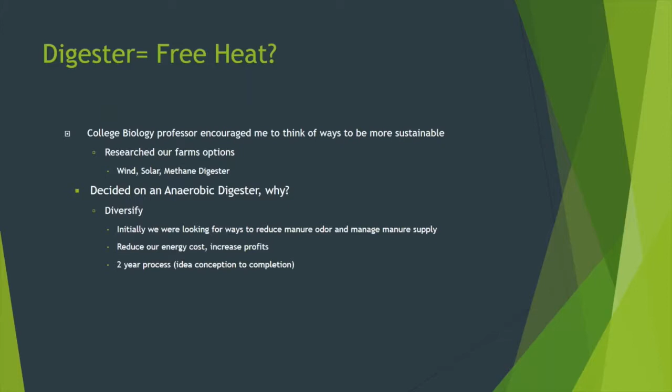We wanted the brand name RCM complete mixed digester, now owned by another company called Martin's Energy. We started in 2008 and sized it for 1,000 cows because the plan was to grow quickly to that number. We haven't gotten close yet, but thank goodness we didn't, for another reason I'll talk about later.

It produces 140 kilowatts an hour of electricity, enough to power our farm and about 80 houses in the community. We flare a bunch of excess gas because our motor isn't big enough to handle all the methane we're producing now. We also separate the solid manure from the liquid manure, which I'll show you how we use.

It was a $1 million project, 60% financed by grants. It doesn't require much time—maybe 15 minutes a day when it's working right. I'll explain what's going on with our digester in a bit, and about heat as well.

What we put in our digester to make heat is manure from about 700 cows on our farm. We scrape the manure 3 times a day, and it's pumped into our digester every 4 hours—a little bit each time. With all the cows we have and the manure we capture, it's about 12,000 gallons of manure a day.

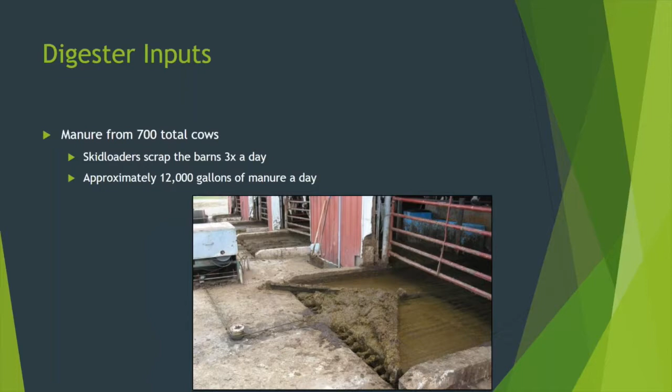Manure is where we get some of our methane, and we also put in food waste. Since 2008, we've been getting food waste from various sources, though it's come and gone in spurts. Recently in June of this year, we decided to invest in a food waste depackager, so we've been getting beer, cans, and lots of different grocery store waste. Anything in packaging—it's helped us have a more consistent food source for our digester, helping us more consistently produce gas that eventually makes heat. Starting this in June has kept us pretty busy.

In the bottom left-hand corner is a picture of our depackager building, which helps us keep all the food waste that companies are trusting us to destroy locked down and secure.

And then the other two pictures show the machine that we use and some of the cardboard that we recycled. Food waste is a big item that we put into our digester. We get about 30 to 50 tons a day on any given day. It depends—some days we'll get zero, and some days we might get 75. So I'd say 30 to 50 tons a day is what we typically get.

So we put it into our digester, and then we have a second one that my brother owns four miles down the road. He also gets some food waste as well, and that's where our young cows are at.

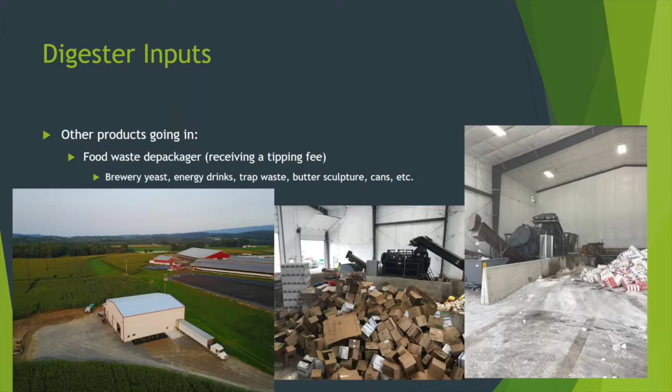Before I talk about heat, I'll talk about some of the things a digester produces. On our farm, it produces electricity enough for about 80 houses, and we sell that to our local power company, PP&L, and they pay us once a year for any excess that we have.

To be honest, as we add more barn fans and more electric motors, we're getting to the point where most of the electricity—we're not there yet, but very little is sold as excess. We still think we have enough to power 80 homes, but in the next few years, if we continue to grow and don't add another motor, we'll just be using all of our energy on the farm.

So that produces income for us. Another thing we get out of our digester is bedding.

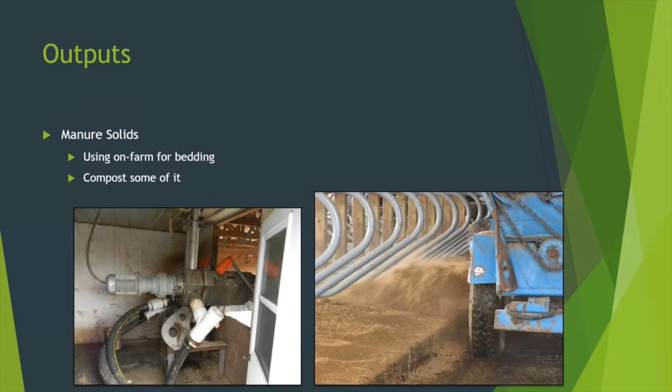I talked about the separator earlier that separates all the solids from the liquid. We use the solids as bedding. It's completely sterile since it's been in the digester at 100 degrees for approximately 30 days, and the cows love it—it's nice and fluffy. By recycling manure this way, it saves us about $50,000 a year, and it's a really healthy, comfortable product for the cows to lay on.

But I know you guys are all here to hear about the heat, so I want to talk about that for a while, especially how we use heat on our farm.

So we're going to go on a little tour of our farm.

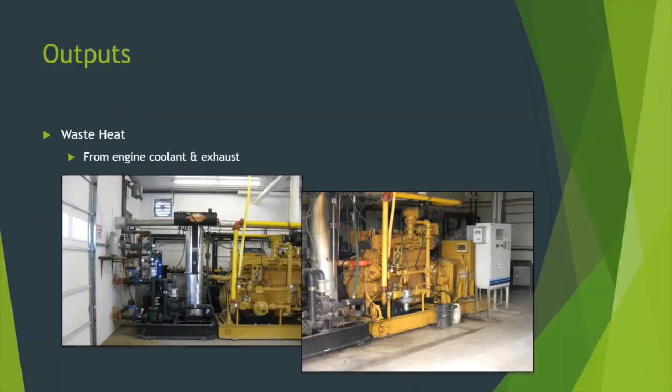So the first place that all of our heat goes to is the actual digester, where the gas is being made. That needs to be at a constant temperature at 100 degrees always, and so that tank is insulated. There's 450,000 gallons of manure and food waste that are in there for 20 to 30 days.

And so we're always adding - if we're adding 12,000 gallons of manure a day and 12,000 gallons of food waste a day, we have to heat that to 100 degrees pretty quickly. So there's quite a bit of heat that goes into keeping that tank warm at the right temperature, so that the bacteria and the methane producing bugs are not dying off.

And so that's where we direct all of our heat, primarily if there's an issue with like the motor or something. So we keep that warm. That's how we keep the digester alive.

The other place that waste heat goes to is our pasteurizer. This is located directly to the right of the digester motor, just on the other side of the wall. And so we pasteurize all of our milk with the free heat coming off that motor.

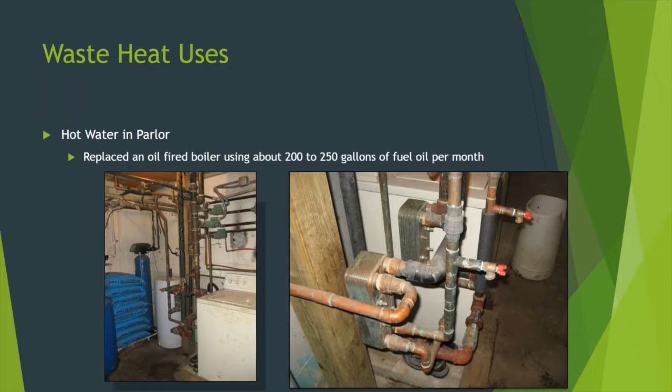We also use hot water for our house, my parents' farmhouse. They have a backup oil furnace in that house just in case, and actually today it's being used simply because we need hot water for the barn, so they're using that. We're sending hot water over to the house at about 180 degrees from that heat exchanger through PEX piping located under the ground.

It's insulated PEX piping, so we don't lose the heat on the way over to the house, and that keeps that house plenty warm in the winter. Again, it's all free heat from our motor that we're using.

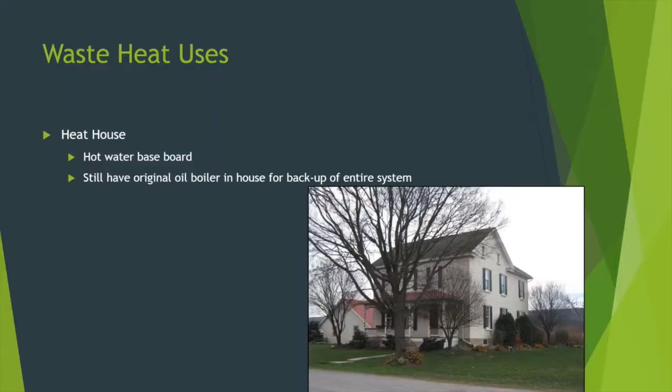A funny thing happened yesterday, we called for fuel oil because we needed to order some, and they called me back and said, 'Are you sure we're sending it to the right address? Because we haven't delivered any fuel oil to this location since the beginning of 2015.' I had to chuckle because we haven't bought fuel oil forever on our facility here.

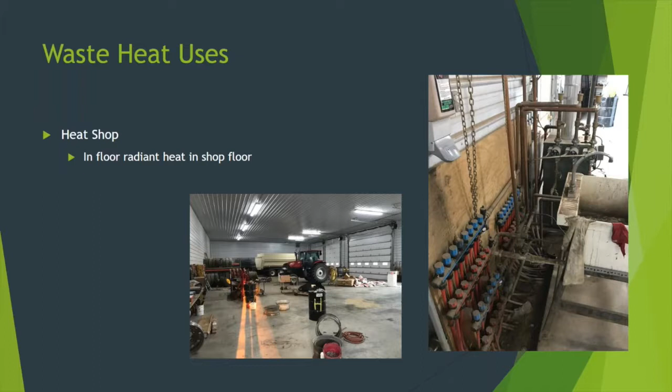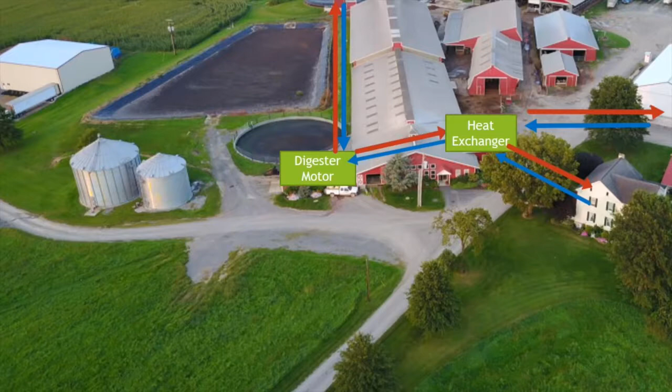This is another location that has a backup furnace that rarely gets used. You can see on this screen the red and blue arrows on the top right showing where our shop is located over there. All that's under the ground as well. So that's where we send hot water through our farm, mostly underground, and we also have access to heat that's in the digester motor room.

When we close the doors where the digester motor is, it'll get to 90 degrees inside there if we don't turn any fans on to vent it. So what we decided to do in the winter is put a fan in the ceiling with some air duct piping. We suck the air from the top of that room and blow it over into our parlor.

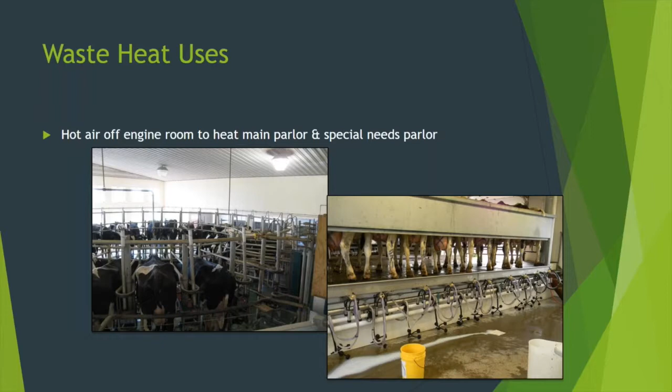We have two milking parlors, one for milking cows and another for cows whose milk we give to their calves. We heat both of those with the hot air generated inside the motor room in the winter. Again, free heat, and it's right next door to the motor so it's easy to get there.

The biggest savings this digester produces for us is the ability to dry our own grain on our farm. We pull all the hot air, and we'll start drying corn here probably in 2 days once our motor's up and running again.

We can control the temperature of the heat just by opening and closing the pipe valve we've built into it. And we dry our own corn.

This year we'll dry about 75,000 bushels of corn, and that'll save us right around $20,000 on drying costs. Again, that's just free heat that normally is vented to the outside air, but we've decided to capture it and use it to make our farm a little more profitable.

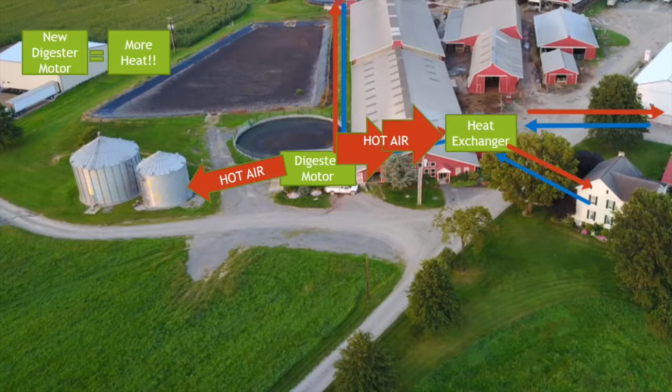A couple years ago, I tried to use the excess heat off the muffler buried under the ground on our current motor, and I built a greenhouse right on top of it, and it blew down as soon as I had it up. So I lost my motivation to continue, but I was planning on maybe doing aquaponics or hydroponics in there and having a greenhouse year-round.

That's an idea for us, but we have local businesses that do use hot water, and we're toying with the idea of just heating a tank in an insulated trailer and delivering hot water to them as they need it.

So there's lots of possibilities for heat. If you have any ideas for us, let us know. Most of the ideas we use on our farm have actually been given to us by other folks. When we built our digester, we had no idea we could use all this extra heat, and there's plenty of extra in the summer that we can use, and with this second digester coming online, we'll have plenty more.

Unfortunately, we're not close to any businesses where we can pipe the heat under the ground over to them in a cost-effective way, but we're always trying to think of ideas.

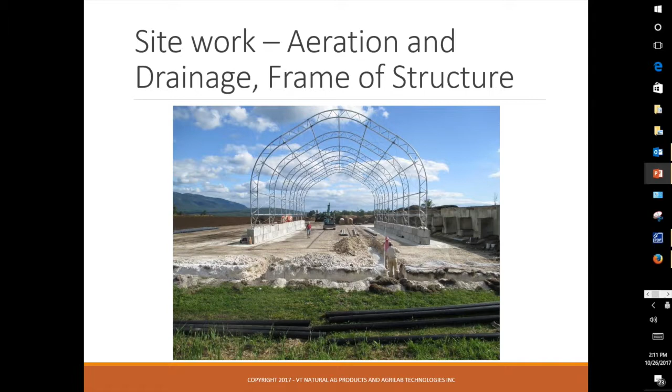What we're doing here is a combination of pipes on grade or above, basically sitting on top of the working pad for the aerated portion under the windrows. To connect them to our fan and the other mechanicals and heat recovery equipment, the pipes did go underground to permit equipment access around the site without having to drive over pipes.

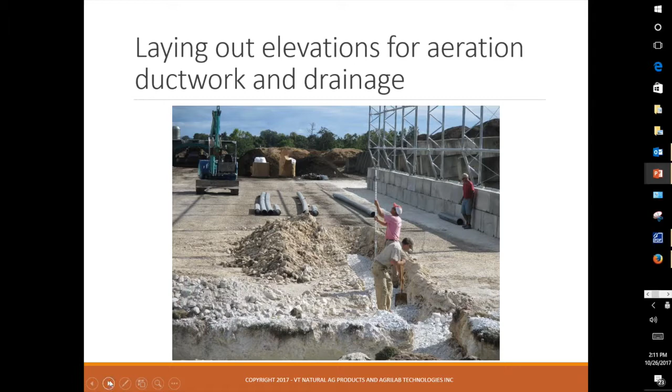Here, this was the header pipe, and this lines up to where we were going to place the box. In the background, that green building is where the Fosters bag and palletize their products, and you can see a few of those wrapped pallets out in the yard as well. That bagging building is one of the energy loads we were able to meet by recovering energy from the composting process to heat the radiant floor in that building.

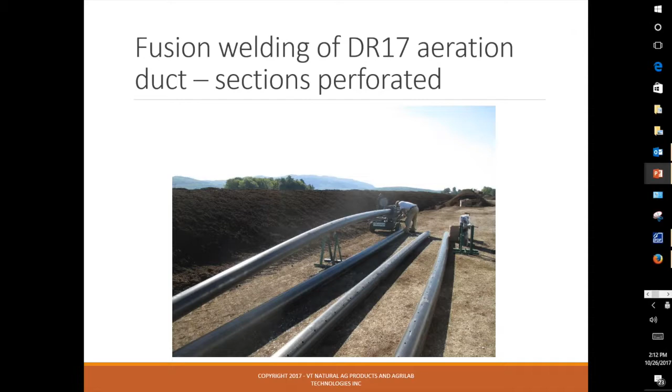Here's a picture of Ryan Kolosky and our team doing the fusion welding of the aeration pipe. We've used PVC pipe on earlier projects, and that's still somewhat common for some aeration systems. This DR17 pipe is made of high density polyethylene, far more rugged and durable. You can either perforate the aeration holes yourself or have it come through the manufacturer.

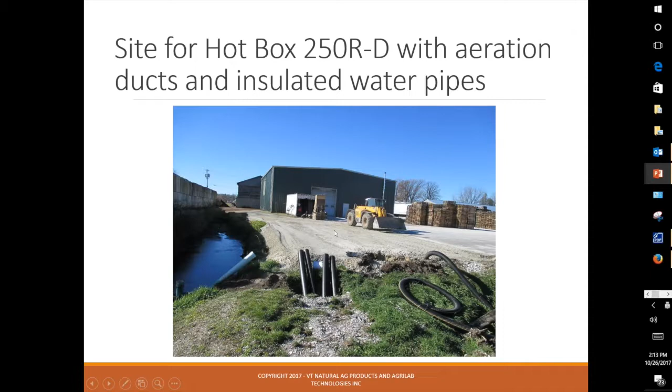After welding and lining up all the pipes, they came out to our landing pad. Again, this is where at the edge of the site our unit will sit, and basically in this 20-foot shipping container shown right here, it shows up plug and play, so to speak, ready to be connected.

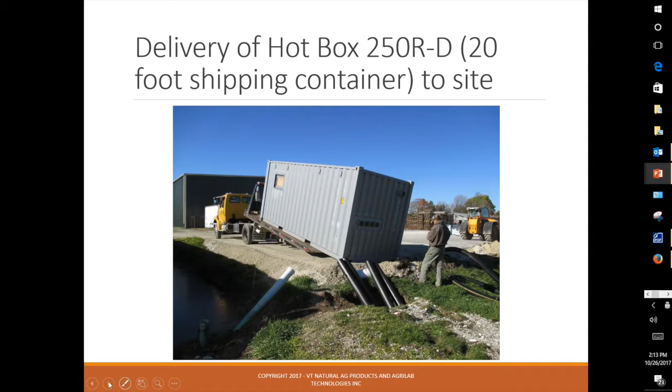These next few slides illustrate how we make the quick connections using flexible or ideally rigid pipe to connect the stubs of the aeration channels to those metal intake ports on the back of the unit. That's where we draw the air and heated vapor into the system to aerate the piles. In this picture, inside our shipping container, the hot box, these blue and red pipes coming up through the floor are how we circulate the hot water and return to the bagging building to provide that heat.

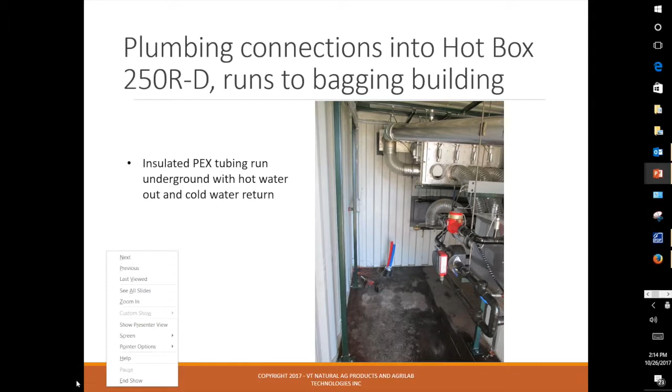So there is a significant load to heat that building and maintain it at a comfortable working condition.

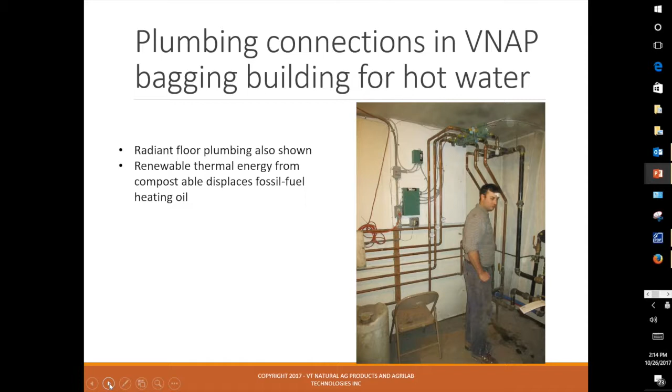Electricians were here too, probably only half a day to figure out how our unit was wired and bring service from the existing panel on site.

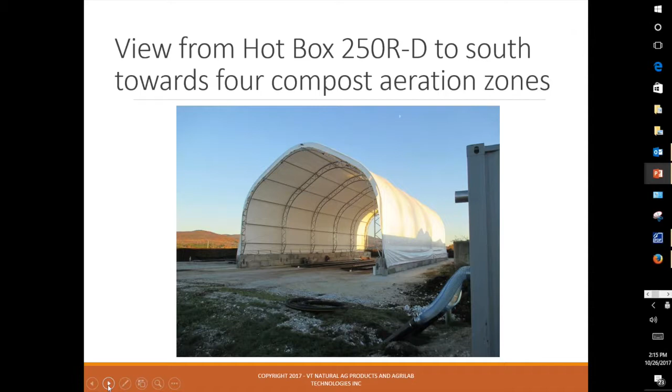After everything's connected, you can see on the right of the screen our shipping container, the hot box, in the foreground. Looking back, the pipes go underground and resurface under the coverall structure. You can see the black pipes come out, with two lines going under each windrow in this portion of the site.

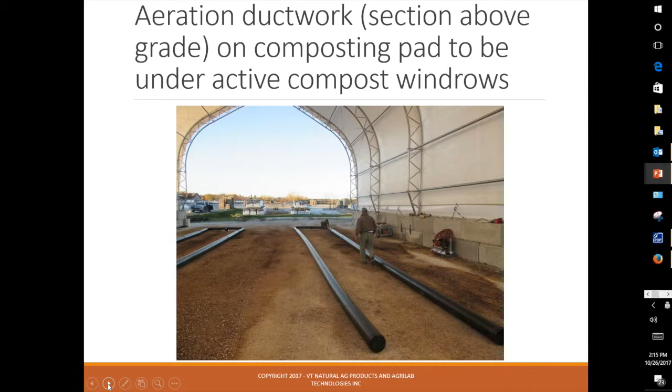A closer view of the pipes under cover here. We did end up bringing them closer together, but at first they were laid out trying to match the 18 or so foot width of the windrow that they use.

As part of the aeration process, we want to be able to distribute air evenly at the base of the pile. Putting the coarse, clean wood chips around and above the pipes accomplishes better air distribution at the base of the pile, the part that in a typical turned windrow would be most prone to running out of oxygen and slowing the decomposition process.

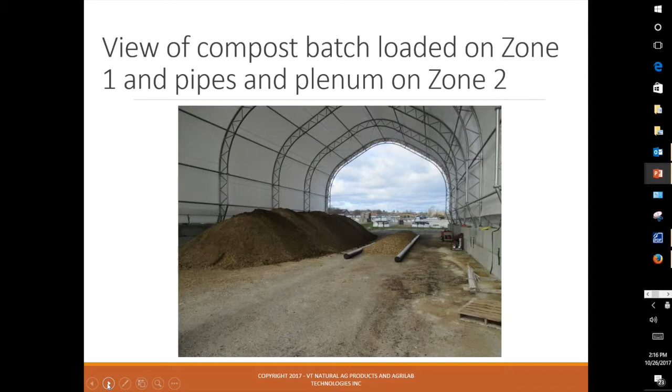This is fairly standard, using resources like the on-farm composting handbook, and there are other engineering methods to get the right perforation schedule, but it's something we've been able to refine over the years on these projects.

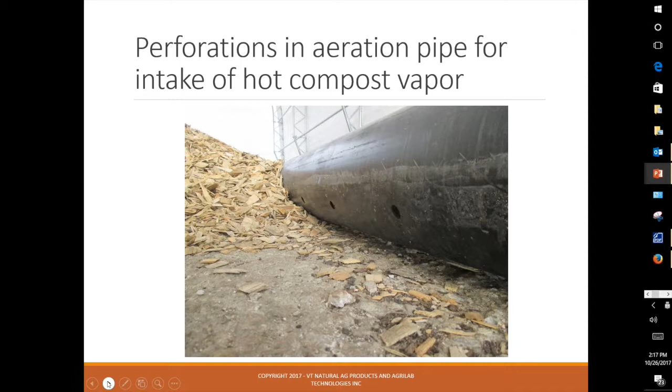Here's a picture for those who may not have seen these before. This is called a straddle turner, essentially a mechanical tiller that goes over the pile and is able to mix, blend, and at least for a short period aerate the materials in a compost pile.

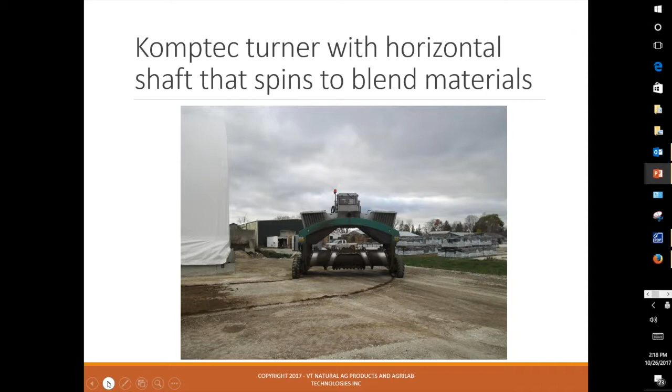While that still happens to some degree during these turning events, that's really the source of energy that in these projects we're pulling into the ductwork and over the specialized heat exchanger, and that's the renewable energy resource we're putting to work on these projects.

This view is looking back from the compost piles toward the aeration unit. Again, the pipes travel underground for some period. The white wrap is insulation around the ductwork as it goes into the intake ports. Above that, to the right, the other circle is the exhaust port, so when we're running exhaust, you can often still see a plume of steam coming out.

On the left, the hood with the orange tape is the intake hood, for the air that we heat up to push into drying zones when we're looking to dry finished product prior to screening or bagging, or other materials like bedding that they've dried using the energy from the system.

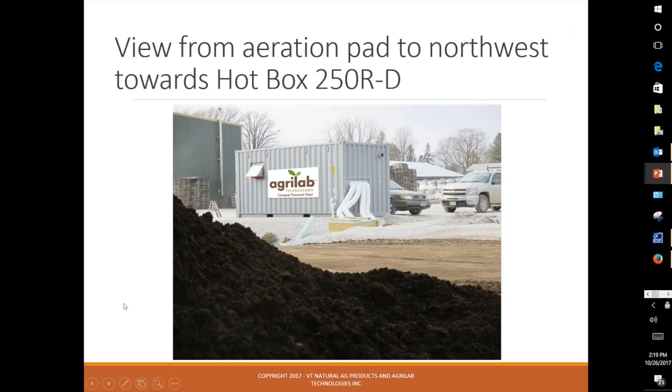The operator on site can use a series of touch screens to track the different temperature trends for different zones, change settings for the fan speed, and the timing for how long each zone gets aeration. One of the big advantages for us recently is that our team can view and control this remotely. Depending on the operator relationship, we can set up, monitor, and control those systems ourselves, or at least provide feedback and guidance when the operator is doing new batches or would like to do troubleshooting.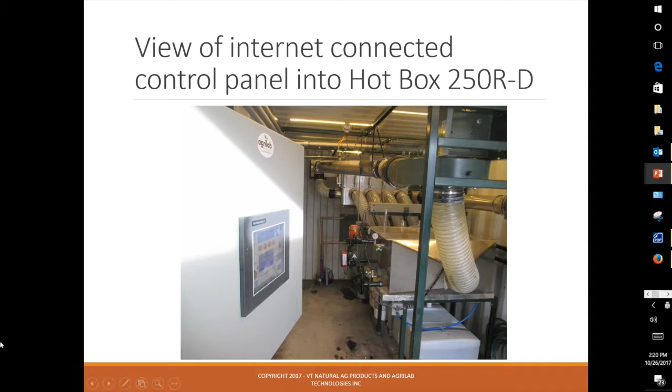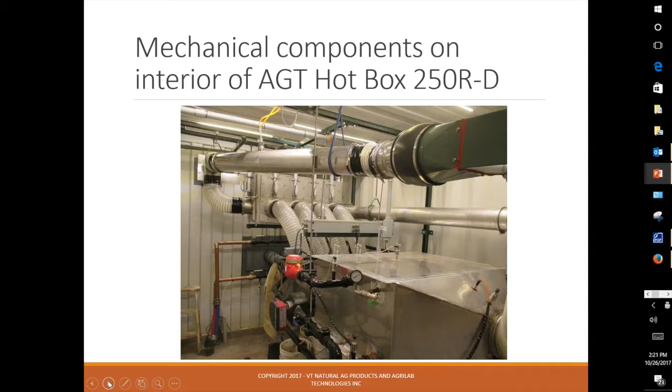Another closer up view. The one thing I can point out in this slide is the top bank of valves and pipes is a recirculation plenum. That allows us to push heated or dried air back out into any of those zones. That's another way we can accelerate the process during the active phase, or push the heated dry air into the compost piles when we're at that phase of the process.

Here's a screenshot of the control panel. Again, it's a dashboard showing the different temperatures and flows, both of the vapor and on the water side, and shows which zones are open, which pumps or fans are on. So this is the interface that we have to work with.

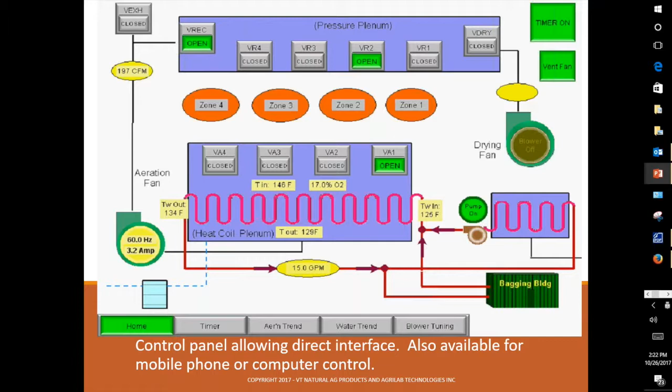These other screens can also help us change the settings on the timer, and the aeration and water trends can show us how much energy and what the temperatures are for vapor and water when we're aerating different batches of compost.

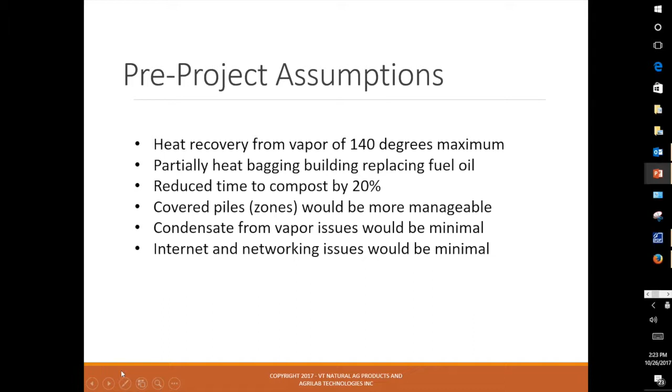Going into this project, we were working with the Foster brothers, who are experienced composters for a number of years. They went in with expectations that given the length of the runs, we'd probably only get 140 degrees into the system, partially replace their fuel oil, reduce their compost processing time by about 20%, and a few other expectations on managing it.

Another assumption was that they wanted to get away from using their propane dryer as much, or completely. They use that for some of their product lines, so that the material is dry and stable before they bag and shrink wrap it and have it sitting in a customer's garden center.

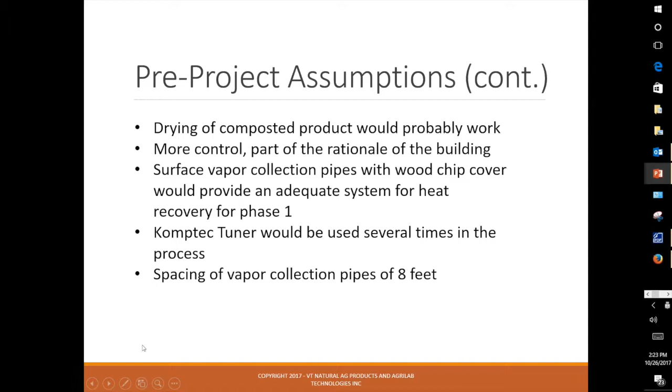The spacing of the vapor collection pipes was something that we expected to match their windrow dimensions initially. What we actually learned is there was a ton of energy in these piles, and providing additional oxygen ended up making them even hotter. We saw vapor coming into our system as high as 170 degrees. That's actually too high, so fortunately we can respond to get it into more desirable 160 or below temperatures by increasing the fan speed and lengthening the aeration times.

So far, we've seen that roughly two-thirds of the oil they used to heat the building has been cut back. Perhaps most importantly, we've reduced their composting time by up to 50%, essentially 4 months down to 2 months.

While there wasn't a whole harsh winter, the compost zones that were covered didn't show a big difference during the active phase. However, the piles under that covered structure are the ones typically dedicated to drying. So if you do get a heavy storm as you're trying to finish drying a certain product, it doesn't go backwards right at the end.

We did need to update some of our condensate traps to prevent water blocks in the lines, but they've been working well for close to a year on that front. They did have some particular data issues with their own site, but we were able to use a temporary hotspot to still do that data transfer where we could view it, and it's been working great for a number of months now.

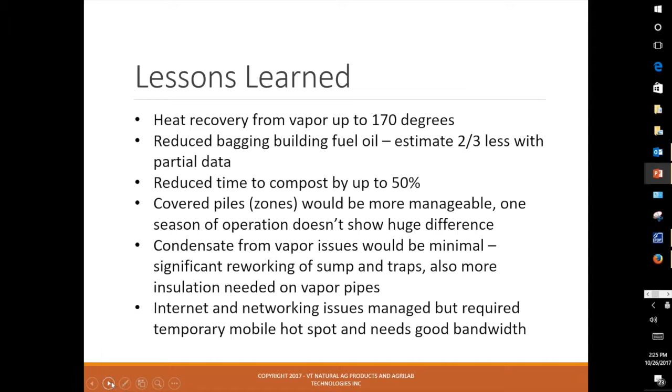Just a little more detail on some of those performance observations. Typically in the winter, it might take them 5 to 7 days to get the cold feedstocks up to 131 Fahrenheit or greater temperatures to meet the process to further reduce pathogens. With our recirculation and aeration feature, we're now typically seeing that in less than 24 hours. That's a great jump start at the start of their process, particularly valuable in northern composting conditions.

Rather than pulling in 0 or 10 degree air on a cold day, we're able to get the piles started with recovered warm air. Again, we were able to cut the processing time in the active phase approximately in half, and cut the number of turns with that Komptec straddle turner in half as well, typically 14 down to 7.

We've got one winter season of the radiant floor, so we'll continue to track the energy consumption. Importantly, the drying process worked very well. This is something that they use quite a bit of propane for, to dry a couple of their product lines. Now that we're expanding phase 2, with an additional unit and set of aeration zones, we'll see if we're able to completely eliminate their propane use in their process.

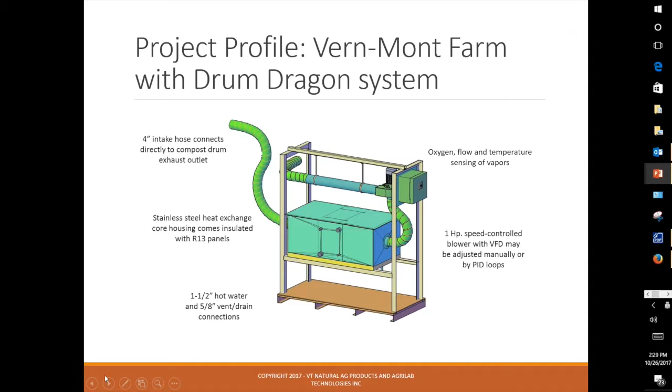The other piece, a couple other brief examples of projects that I wanted to share as I wrap up the presentation here. Some people are familiar with rotary composting drums. We developed and have installed a simple heat exchange and aeration unit to tap into the end of it. Had some fun calling it the drum dragon. Basically, we're tapping into the exhaust of those drums and putting that into a hot water recovery system.

This project's down in the most southeastern corner of Vermont. The Dunkley family runs Vern-Mont Farm, goes right to the Connecticut River, which borders New Hampshire, and right to the Massachusetts border. More or less, this Enviro drum runs their separated manure solids through the drum, a day plus retention time, and it's constantly putting out exhaust vapor at anywhere from 140 to 155 degrees.

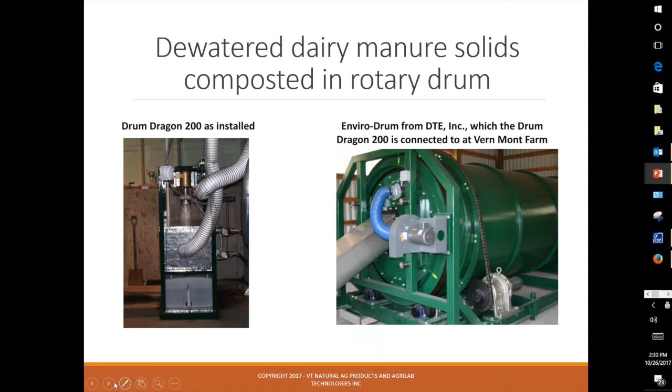Our early estimates right now are around $6,000 a year. We'll continue to work with Jeff Dunkley to track his actual utility savings, but he's very pleased with its minimal maintenance, taking advantage of a resource that was just putting a plume of steam out into the air otherwise, without our unit. The last example I'll share is our newest project that we've installed this summer in northern Connecticut.

There's less farms still active for dairies. Part of the way the Collins have diversified their operation is their ice cream stand, but they also have Collins Compost. Beyond their dairy farm manure, they take in local leaves and wood chips from landscapers, and also show bedding from nearby expositions or fairgrounds, the Big E in Springfield, Massachusetts.

They've been composting since the 90s and have a dedicated following of compost end users in their area. They've always used this loader or other equipment shown to turn windrows. This year, with support of the Connecticut Farm Energy Program, they installed one of our systems and have begun aerated composting.

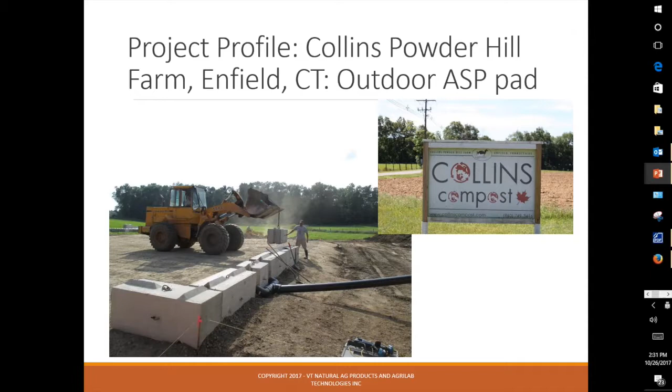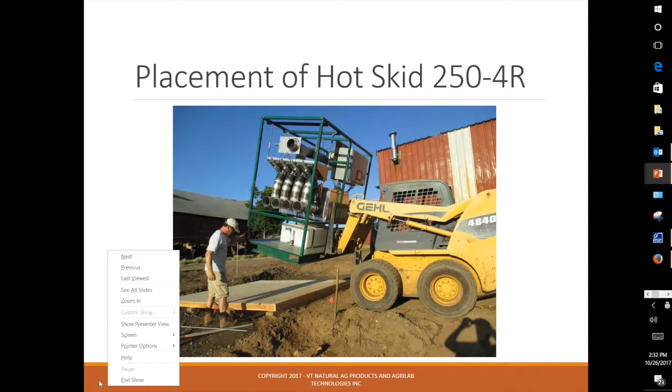Here's a shot of their aeration pad. I'd call this the lower end of our capital costs for integrating into the infrastructure of a site. These pipes were put out on a gravel pad, as you saw, with a block wall framed around the outside as a push wall and containment wall. They're interested in building a covered facility with concrete if they can get cost share funding from USDA or other sources over the next couple years. But already they're able to get this into use.

Basically, in that shed to the right is our equipment that provides the aeration, the draw from all these pipes as it's loaded with the compost. And then the hot water we recover is sent to their milk parlor for use.

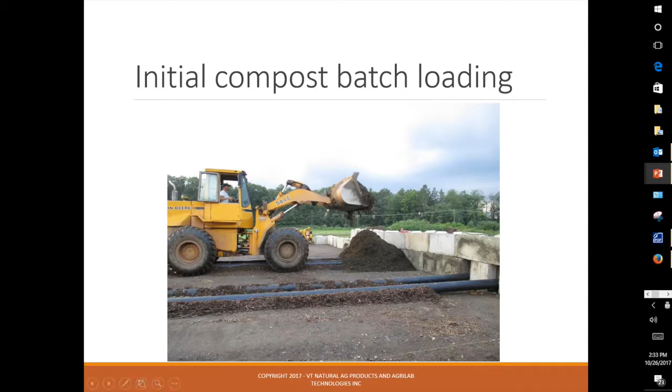Here's a shot of John Collins starting to load some of the batches, and here's a shot later in the summer, essentially run as a 4-batch system. They're able to load different piles at different times, and have gone with anywhere from a 2-week to about a 6-week interval that they'll pull out and reload batches. We're heading into our first winter season of operation coming up.

A couple findings so far. Started up in July. In spite of the relatively low-cost infrastructure, they're still able to get temperatures that have peaked as high as 154 degrees Fahrenheit, circulated at 12 gallons per minute. Currently they did the initial connection into their milk room for sanitation, washing their bulk tank, milking equipment, and actually washing the cows before milking.

But they've found they have excess energy beyond what they're using in the milk house, and will be connecting it into their adjacent equipment shop. And if they find they have enough energy still, it's a couple hundred feet more to John and Ashley's house on the farmstead. Again, just acknowledging Connecticut Farm Energy support, helping bring this to fruition.

Thank you all for taking a look at this. Certainly a lot of people have contributed to this project and development of this technology over a number of years. For your reference, there are additional slides that talk about some of the history of how we came to this point in the technology, both individuals as well as other project sites we've done over the last few years. Thank you very much for your attention, and happy to take any questions via email when you have the opportunity.

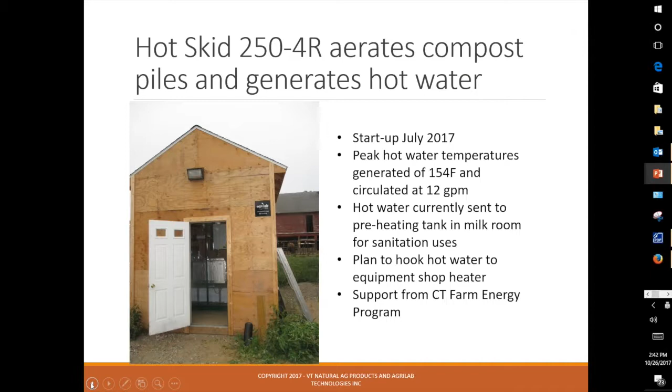What was the other question I had? Oh, that last example you mentioned - was that a static pile or a turned pile system? That one is primarily static, so any turning they would do would be a single flip from side to side.

What they would like to do is harden this facility a little more with a concrete floor, put in recessed channels, and add a coverall or other type of structure, which would allow much easier flipping or turning from side to side. So while this really accelerates the early stages of active composting, you're still going to have an outer crust that you'll want to physically handle if you're using this material for a retail product.

If it's being used exclusively for a coarse bulk compost or for ag application, that may not be necessary. So that's entirely determined by your targeted end use of the compost.

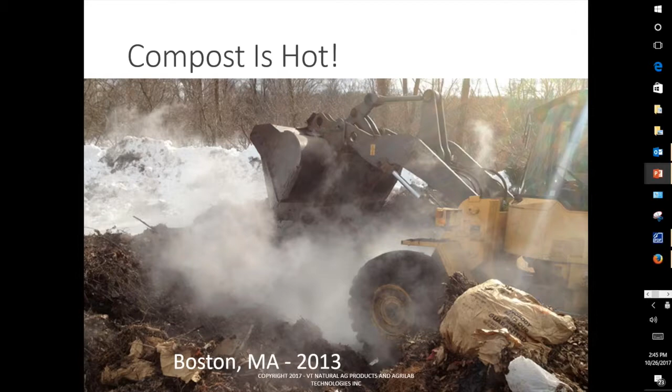Going into the background and history of composting and heat recovery, while we're really proud of what we've done, we've certainly learned a lot from some other sharp people and always learning from our customers. The idea of these slides is that while some people may have a concept of the composting and decomposition process releasing heat, temperatures of 155 up to 160 degrees are fairly common on medium and large size compost operations. It's not necessarily what you'll see in your backyard bin, but you can see the steam coming out of piles when it's turned, even in March, or snow-covered piles in the background. So you give those microbes the right food, moisture, and air, and they're going to go to work and start releasing a lot of energy as one of the co-products of this process.

This has been known to some degree for thousands of years, and there's at least anecdotal reports of the Chinese, the French, and others doing this with garbage heaps or compost heaps under cold glass houses. As agriculture modernized and solid waste handling modernized, some of these old practices went away, but in some way we're looping back to that, and we're trying to optimize it, particularly with aeration systems as our means of facilitating the energy transfer.

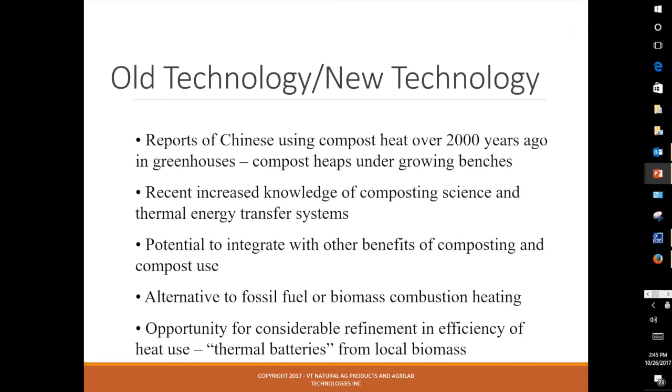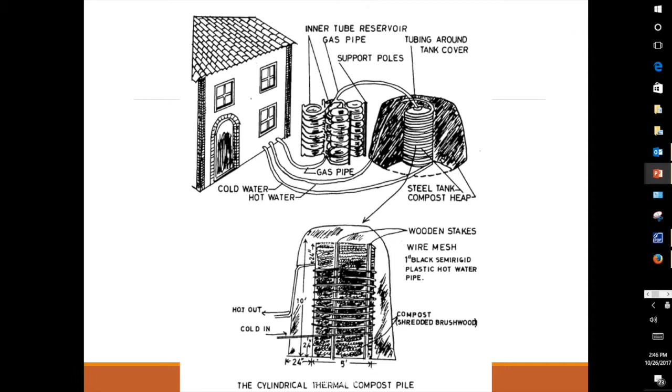Jean Pain is who people talk about with compost heat recovery. He was a French-Belgian farmer who developed these mounds, largely of wood chips and forest products, but he would physically coil pipes through the process. So this informs a lot of our work, but we do not put pipes in the piles. This is often an education process we share with people, that no, we don't have pipes in the piles. That would not be practical at any large scale farm or commercial municipal compost operation. But we do benefit from his ideas.

Agrilab, who I mentioned before, kind of the creators of some of the proprietary and patented aspects of the heat transfer technology, are in Windsor, Ontario, right across from Detroit. In this relatively commercial urban area, they did a pilot project to test their early systems using composted manure, bedding and spoiled feed. Based on that, they started marketing these products, and that's how I actually heard of them and helped bring them into the project in northern Vermont at Diamond Hill Custom Heifers. Agrilab is still active in a lot of industrial, aerospace, oil and gas applications, and they helped us and licensed us the technology to start a Vermont-based company.

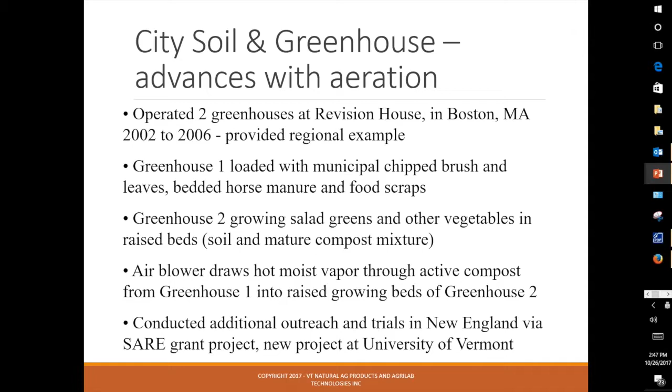City Soil and Greenhouse is the other company to draw attention to. Bruce Fulford in particular has been doing these compost heated greenhouses on and off through his career, going back to the New Alchemy Institute Revision House, and now he's the contracted operator for the Public Works Department in Boston for all their municipal leaves. Here's some drawings of some of the early systems he developed, and Bruce has been a great social activist as well, getting urban agriculture projects initiated, working with this community in the Jamaica Plain, Mattapan part of Boston.

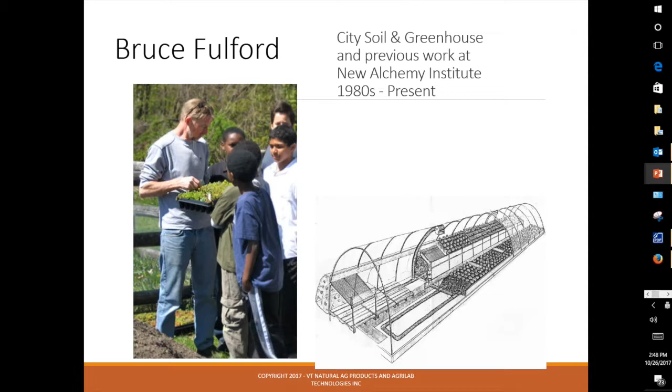These next slides are of different projects that we installed in Vermont and elsewhere in the Northeast. All our early projects were on farms. This project and farm is owned by Terry and Joanne Magnan. They're only about 8 miles south of the Quebec border, so things get cold. As they were building a new calf barn, they wanted to develop a system where they could recover the heat, and I was able to come in and be part of the project to help make that happen.

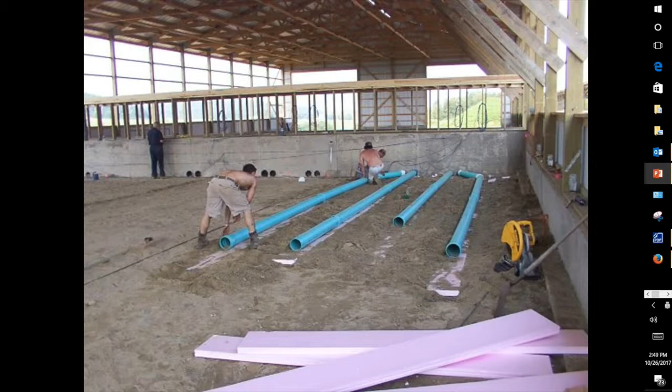Pointing out that while a lot of manure these days is managed as a liquid, they had a lot of solid manure raising the calves and young stock. So having that solid feedstock is important to identifying good compost sites. There is mechanical dewatering equipment, and I believe Brett Reinhold, they have a separator at their farm that does that, recovering the fiber from the liquids, but having the solids is important. Here's some construction shots of how the piping was laid down into the floor with insulation, and then this was cast into a concrete slab.

The holes in the wall that these pipes are connected to go back into this mechanical utility room. Again, this is our earliest system back in 2005. This went online, but we used a lot of commonly available materials, very much a kind of Yankee farm creation.

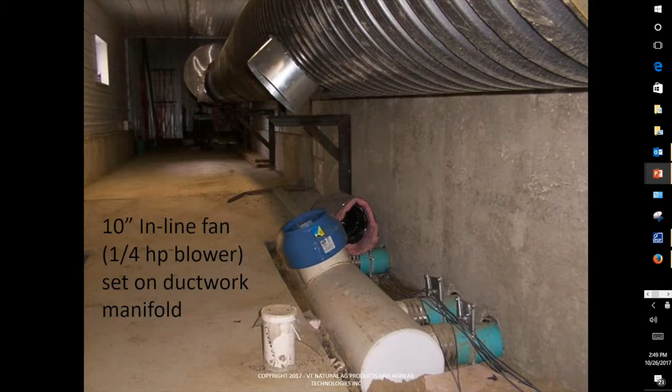The manifolds would draw the vapor in, and then the fans would push it up into the ductwork. Within that ductwork are some of our other heat exchangers, a more longer linear approach, but they would transfer the energy in the compost to a hot water tank that was then able to be circulated to a number of different zones, heating floors, different parts of the barn and calf facility, as well as for using as wash water and heating water to make the formula, the milk replacers for the calves.

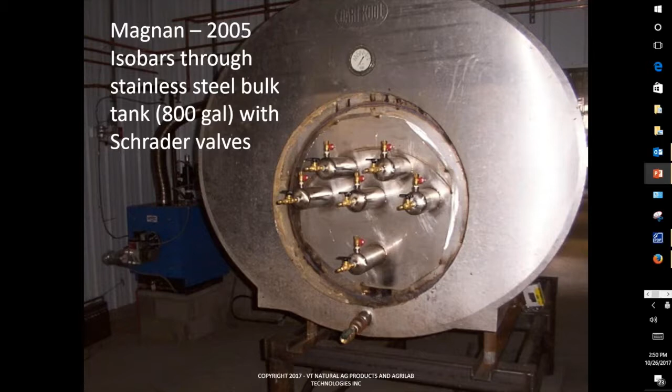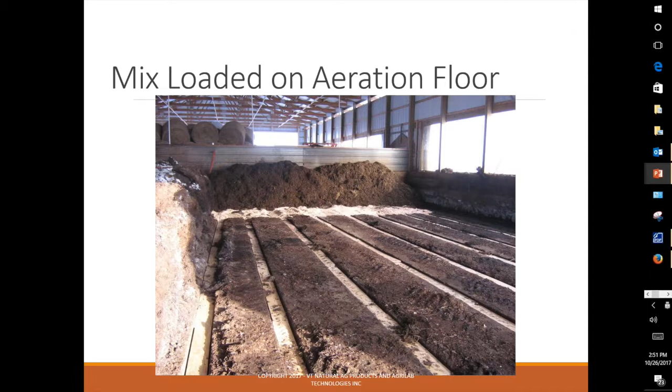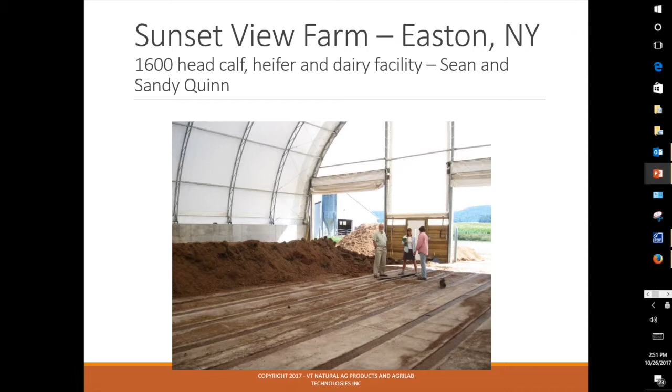There's Joe Ouellette, the patent creator, a gentleman from Canada, when we were down at Sean and Sandy Quinn's farm in New York State. They put in a similar system on their farm within a coverall structure.

On the other side of the working floor is their aeration ducts. Insulation is important to maximize the amount of heat that we can recover.

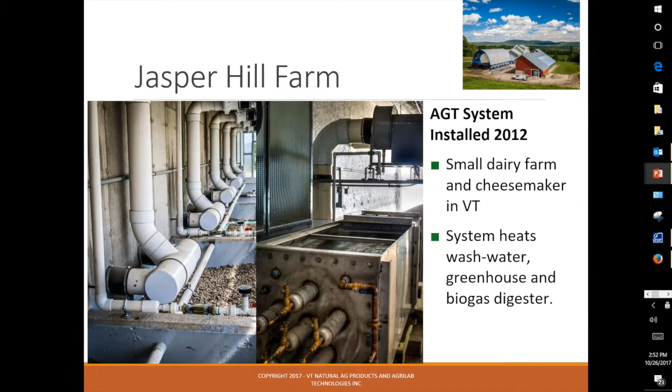So there's composting bays on the dairy barn side of this building. They've got small digestion tanks, visible through the door, and a greenhouse portion of the building facing south and east. Really cool operation all the way around, and they installed another one of our early systems. We'd aerate the compost piles and then recover it through a system to use to heat the greenhouse and also maintain temperatures in their biogas digesters.

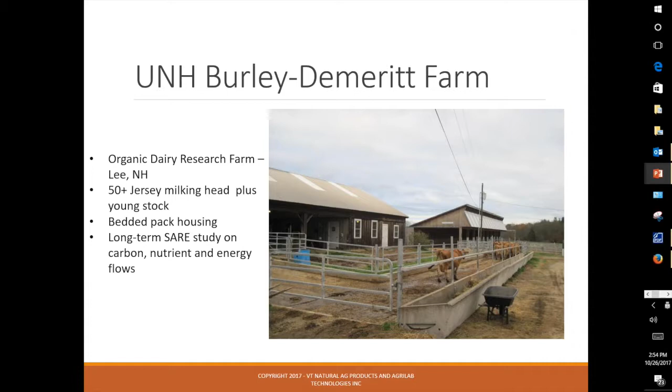They not only do a lot of composting for a number of years of food scraps and other local resources, but they feed as much of the food scraps as they can to a flock of chickens, and do not feed these chickens any grain, and were, at one time at least, the 4th or 5th largest egg producer in the whole state. Just a very interesting holistic operation. Jean came up from Cornell to check out our work.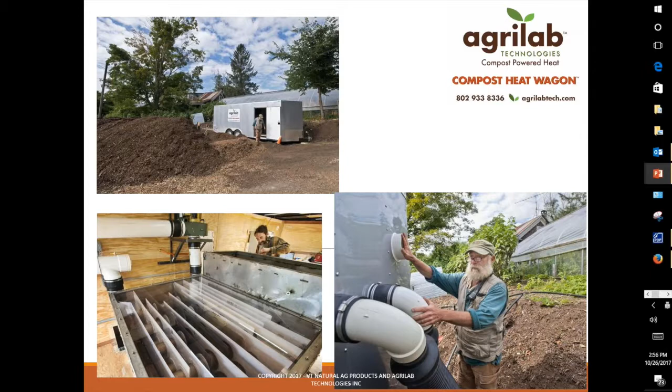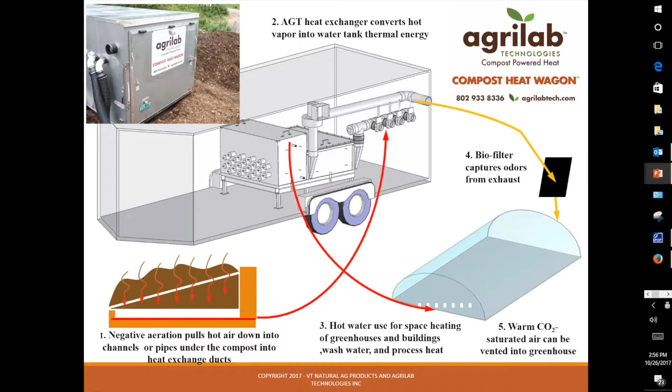Just a shot of how that project was set up, heated their greenhouse. Schematic of the flows, again pulling the air in from the compost, running it through the heat exchanger, directing that hot water up to the greenhouse for heating the building, as well as for tempered irrigation water. Karl Hammer, their longtime owner-operator, would grow tomatoes, peppers, and other things that prefer to have warm water rather than being shocked by cold well water.

Some of our earlier remote tracking that we were able to track the trends. We've refined this further since then in the last several years.

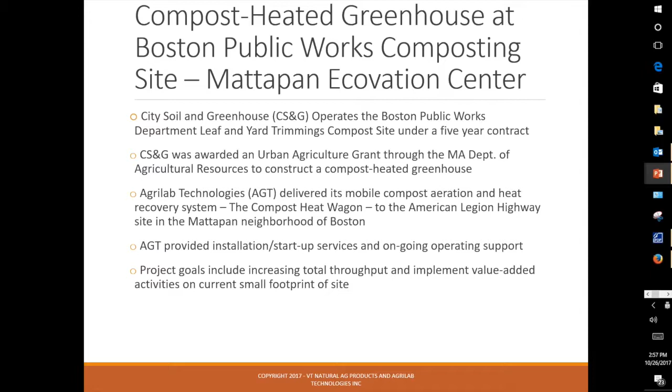A couple other projects to close out with: the compost heated greenhouse in Boston. We got to work with Bruce Fulford, who I mentioned earlier. Beyond composting the leaf and yard trimmings from municipal sources, they developed an urban agriculture portion of the site and created a number of gardens and a greenhouse that was entirely heated by compost. They dubbed it the Mattapan Ecovation Center. It actually was awarded the Greenovate Boston recognition last year for sustainable agriculture, and they've brought a lot of people in from their local community.

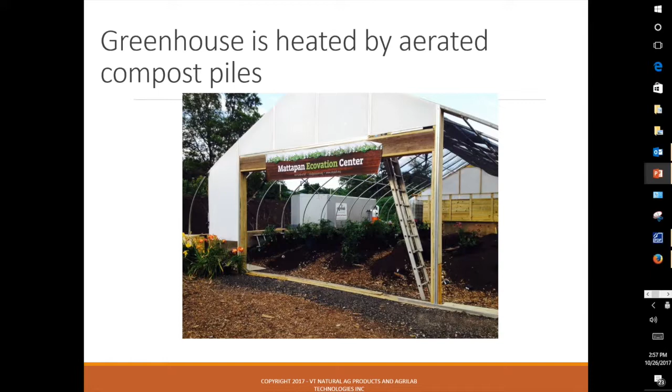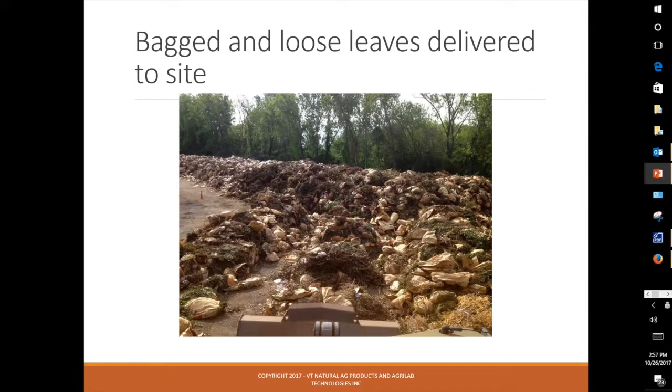Their primary inputs are bagged and loose leaves. The city has approached them to start taking in food scraps as well. That has not happened yet, but we hope it can.

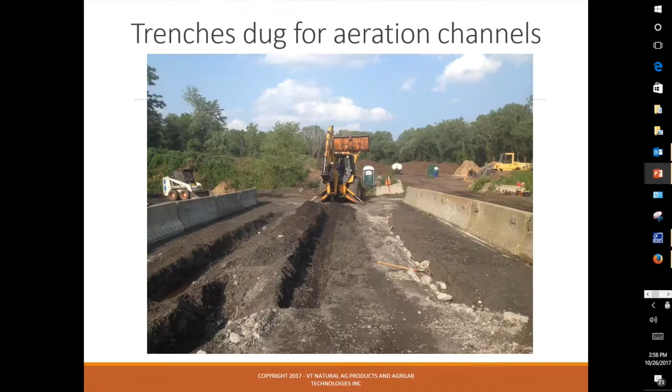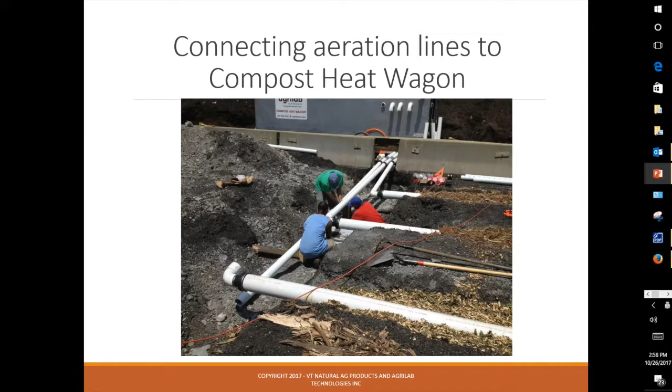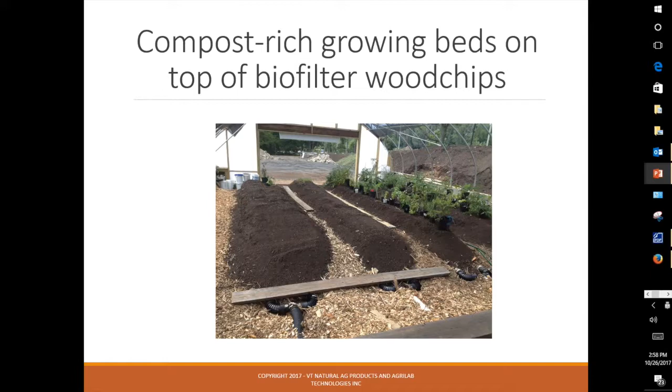The north end of the greenhouse had 3 aeration bays, and the south end of the greenhouse was growing space with an odor biofilter. So beyond recovering the hot water, they also scrubbed and recovered some residual thermal energy through these raised growing beds.

Fascinating project, and in the about a year and a half that we had our equipment down there, they cycled through something like 10 different rotations of food and ornamental crops. It was a pleasure to work on that project, and we've been working with them on a couple projects to deploy this on a larger scale at the nearby Parks Department and a couple other facilities in this part of Boston.

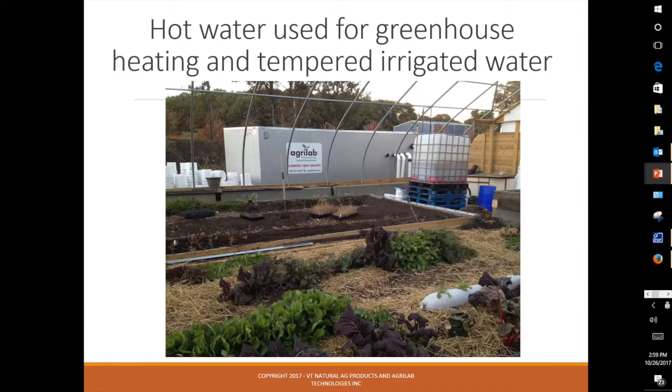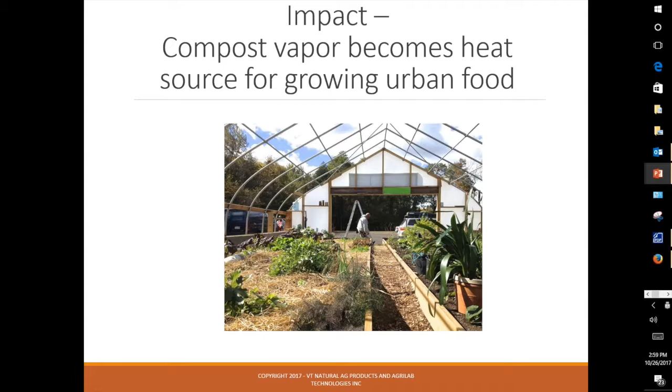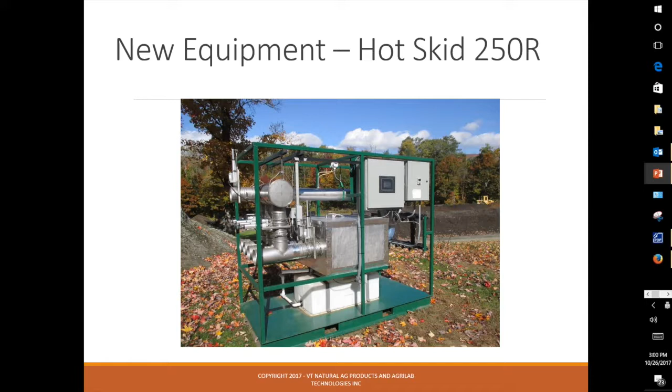Thought there was a nice picture of fall foliage to end the presentation on. So thank you very much for your interest.